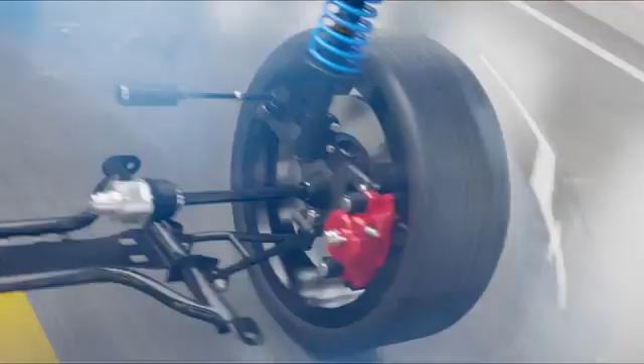When it comes to the performance of an automobile, people usually think of horsepower or the cubic capacity of an engine. But all the power delivered to the powertrain could be wasted if not handled by an efficient suspension system. The shock absorber, also known as a damper, plays a vital role in the suspension system, not just for providing better comfort, but it also ensures consistent traction to the road surface, better steering stability, and also improves handling of the vehicle.

Technically speaking, a shock absorber is nothing but a hydraulic pump which absorbs the kinetic energy of the suspension system and dissipates it into the atmosphere as heat.

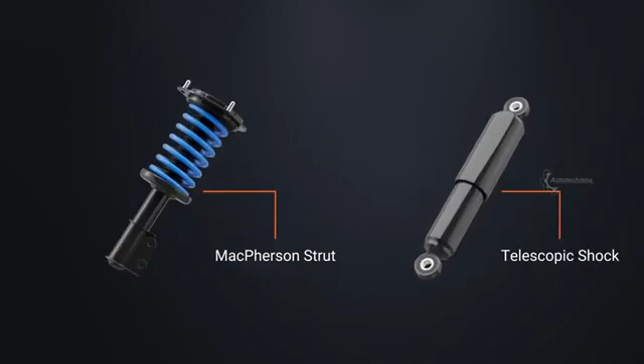Shock absorbers found in most vehicles can be strut type or conventional telescopic type, although the operating principles of both are almost the same. In this presentation, we're going to take a look at the strut type shock absorber, mostly found in the front suspension of an automobile.

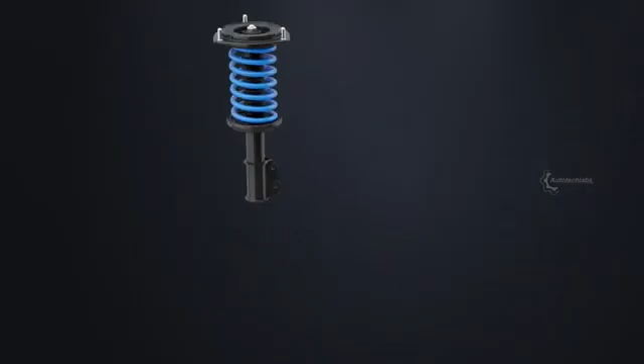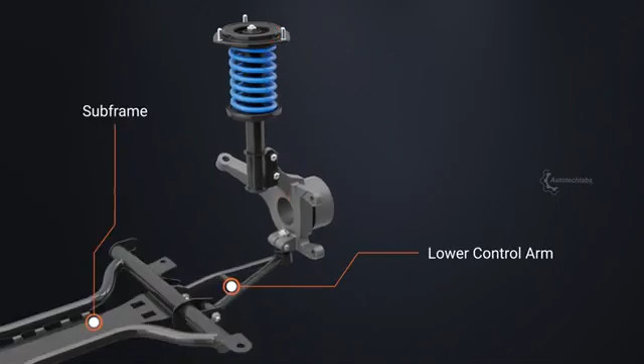A strut-type shock absorber is mounted between the body and the steering knuckle. With the steering knuckle connected to the lower arm, the system constrains the wheel displacement only to be in the vertical direction. The steering knuckle is designed in such a manner that the wheel can be turned within the limited range by the steering rack assembly.

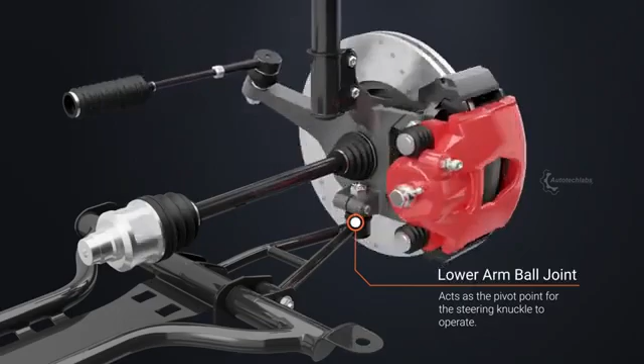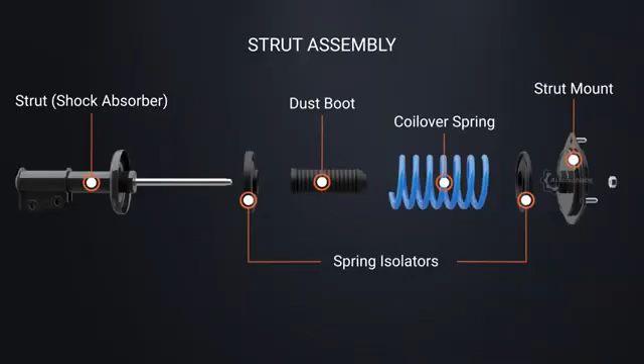A strut assembly comprises a shock absorber, coilover spring, top strut mount, and a dust boot over the piston rod to prevent any contamination to the oil seals. Despite the popular belief, it's the coilover that does take the weight of the vehicle and not the shock absorber.

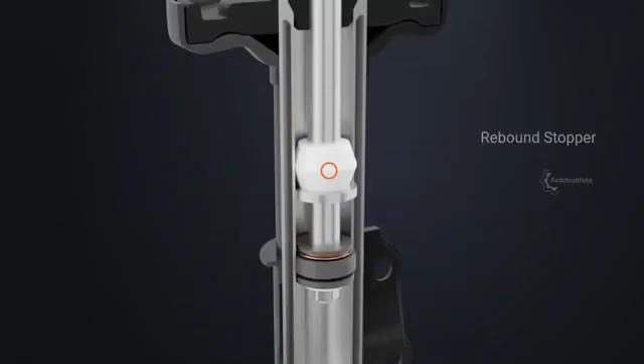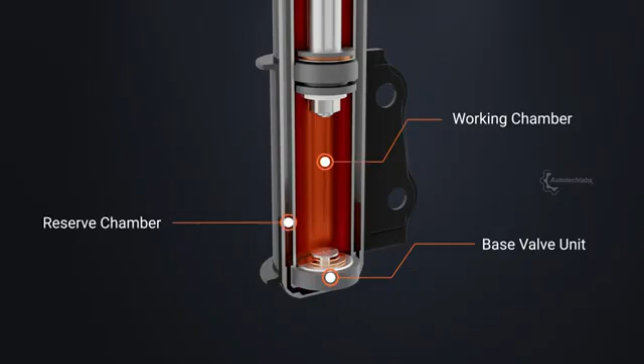The strut housing includes a piston rod, which moves up and down, a rebound stopper, a piston valve unit, a base valve unit, and the hydraulic fluid. The shock absorber is designed to have a working chamber and a reserve chamber. The hydraulic fluid transfer between these chambers is controlled by the base compression valve.

Such a configuration using two chambers is known as a twin-tube shock absorber, although other variants such as the monotube shock absorber, which uses a single chamber, are also present in the industry.

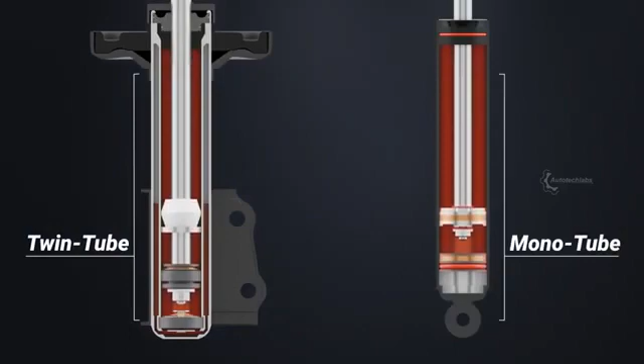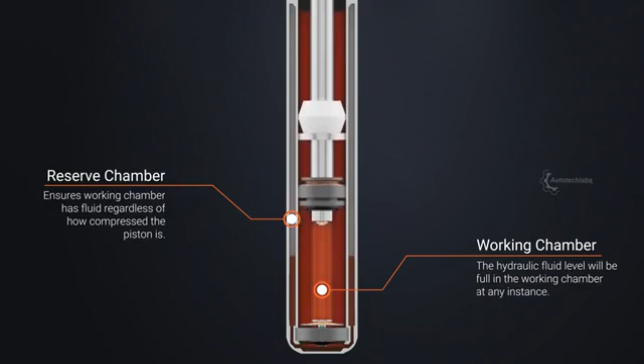For the shock absorber to provide its optimum performance, the working chamber must be full of fluid at all times. The purpose of the reserve chamber is to ensure that the working chamber is filled with fluid, regardless of how compressed the piston is. Thus, the reserve chamber will always be partially filled.

The system is added with liquid nitrogen while manufacturing, which expands and acts as a compressed gas on the remaining volume of the reserve chamber.

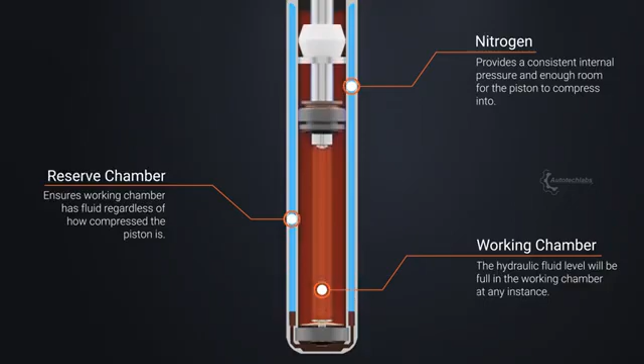The calibrated valve at the base controls the resistance experienced by the piston during the compression phase, while the fluid flows almost freely from base to top through the piston valve.

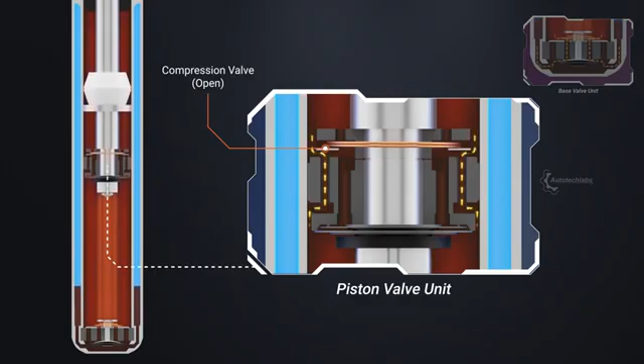As the piston moves towards the base, the compression valve opens in a controlled manner, allowing the excess fluid to flow to the reserve chamber.

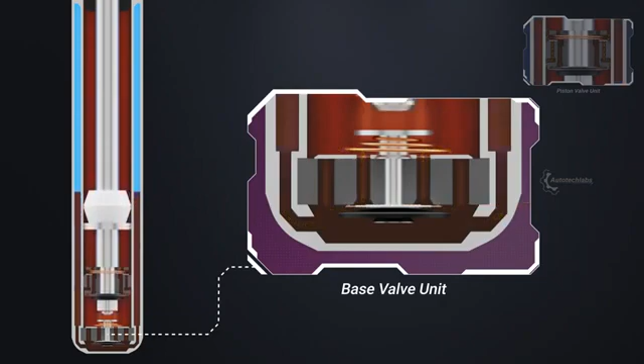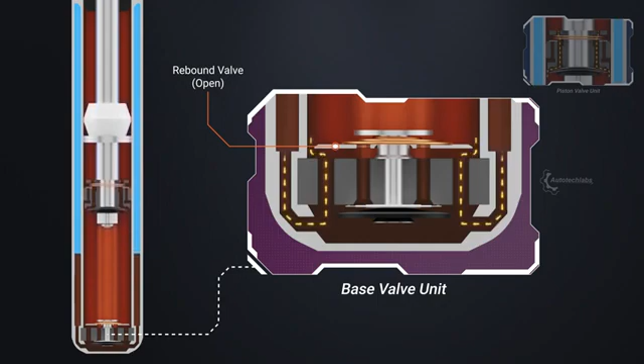During the rebound phase, the piston rod tries to restore its position against the compressive energy, and the rebound valve ensures this happens in a controlled manner. As a result, the previously displaced fluid to the reserve chamber is pulled back to the working chamber.

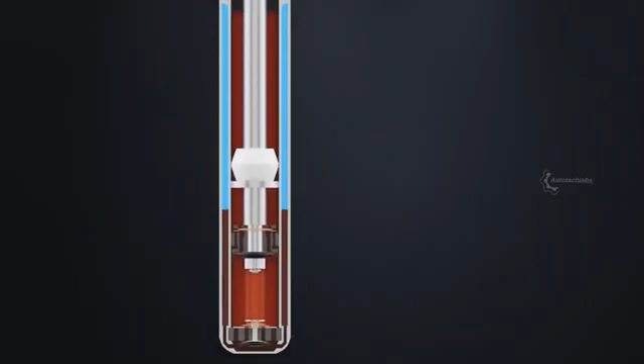The repeating action absorbs the energy from the suspension system and transfers its heat to the atmosphere.

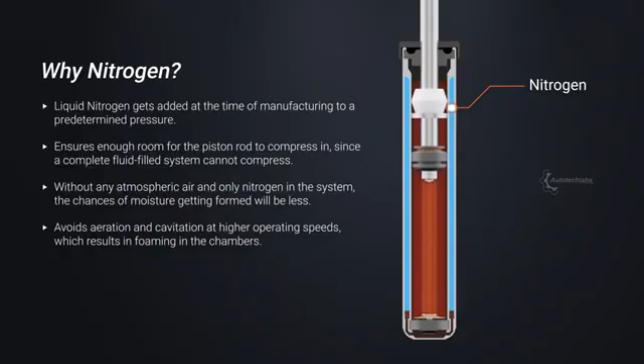With the pressurized gas added into the reserve chamber, the system avoids the phenomenon of generating air bubbles in the fluid, known as cavitation or foaming. Damage to the oil seal could cause fluid leaks, resulting in foaming and inconsistent shock absorber performance.

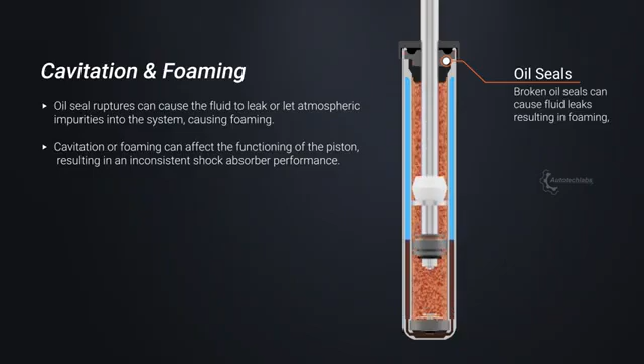Shock absorbers can usually last up to several thousand miles, but they do get defective over time due to the millions of operation cycles they have to endure.

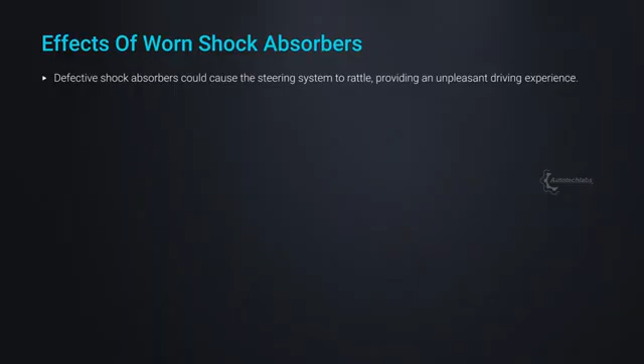Defective shock absorbers could cause the steering system to rattle, providing an unpleasant driving experience. A torn oil seal can cause the hydraulic fluid to leak, resulting in poor shock absorber performance.

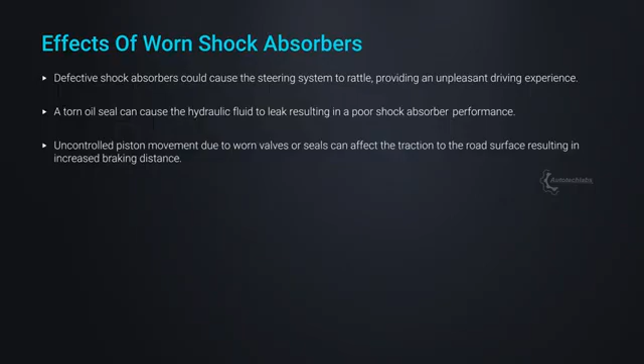Uncontrolled piston movement due to worn valves or seals can affect the traction to the road surface, resulting in increased braking distance. With worn shock absorbers, the steering system could swerve your vehicle hard off the road even with the slightest movements.

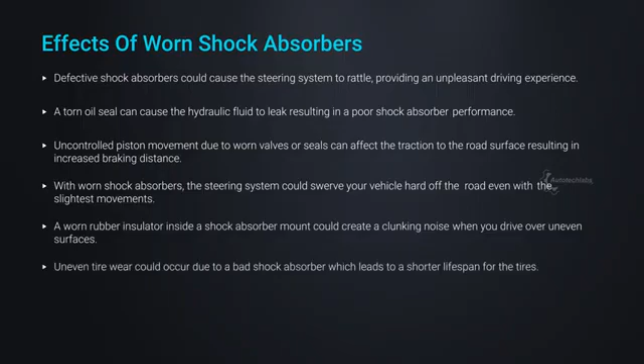A worn rubber insulator inside a shock absorber mount could create a clunking noise when you drive over uneven surfaces. Uneven tire wear could occur due to a bad shock absorber, which leads to a shorter lifespan for the tires.